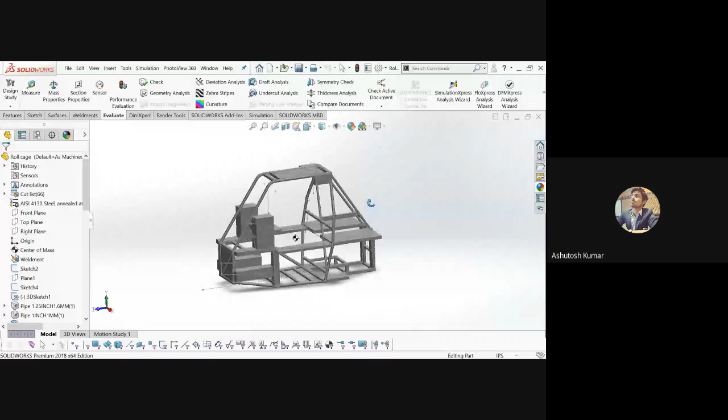This is our SolidWorks model. I have designed a roll cage considering our specification and rule book. This is a common roll cage used for an all-terrain vehicle. If we are designing an electrical ATV, we will use this type of roll cage, and I have used the Weldment command to manufacture and design it.

I'll be importing this roll cage into ANSYS. As you can see, SolidWorks only allows SLD files to be saved for our roll cage. So we will first save it in SLD format, then convert that SLD file into ANSYS-compatible files. ANSYS supports IGS or STEP format files.

Just go to Save As, which you can find on the topmost bar of SolidWorks. Go to Save As, and you will see that SolidWorks only supports the SLD file by default. So change the format and you will find IGS or STEP file options. We will save it first as an IGS file and then as a STEP file, since both formats are supported by ANSYS, and then we will import these two files into ANSYS. I've already saved them.

So I'll be switching to ANSYS now. This is our ANSYS window, ANSYS Workbench. Is it visible?

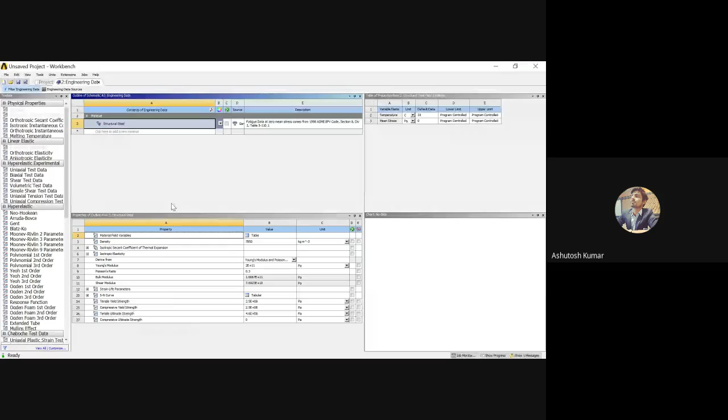It is having all the specifications such as density, you can see 7850 kilogram per meter cube, and all the other specifications: tensile yield, compressive yield, tensile ultimate, and compressive ultimate. These are the specifications that we are going to use over here. You can see engineering data is clicked right, so specification of data is done over here.

Now we are going to import a geometry over here. Just click on geometry. If you right click over it, you will find a dialog box where you can see different options. It is showing you a new SpaceClaim geometry. ANSYS provides a platform, the SpaceClaim geometry platform, in which you can develop your own model in ANSYS itself. If you want to import a geometry, just go to import geometry over here and go to browse, and you will find your saved files over there.

So I've already saved some files, roll cage in IGS format and roll cage in step format. I'll be using the roll cage step file as a model to be imported. So our model is imported, and you can see geometry has been ticked right.

Now what we are going to do, we will be specifying some of the specifications in the model: what type of force do we want to apply on it, what are the meshing parameters on it, and then what are the specifications of the force that we are going to apply - is it on the front impact, side impact, or rear impact.

So for that, just right click on model and click edit. You can see our mechanical workbench will be going to open over here. The status you can see over here is starting mechanical workbench. So ANSYS will be switching the model to the mechanical workbench, and then connecting this ANSYS workbench to the mechanical workbench.

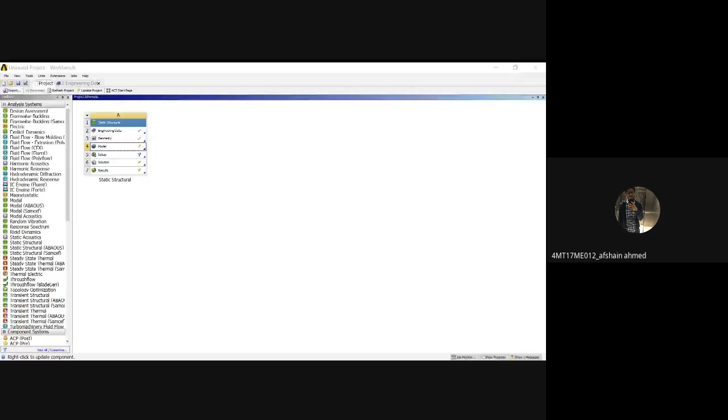Sir, may I interrupt you? Yes, sir. I think there is a problem with the video feed. I'm not so sure, but anyone in the audience, are you able to get the video feed? Let me check, sir, if there is any problem I will sort it out, because I am not getting it. Yeah, I think the video is stuck, because I'm not able to get the video feed right now. Let me check. Sure, sir.

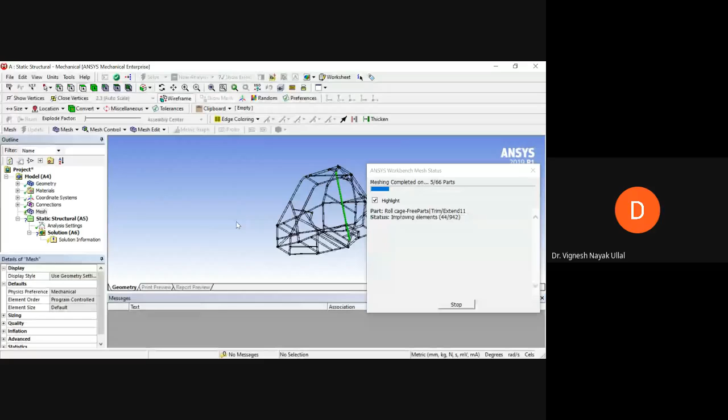Okay, okay. So you can see the meshing process is going on over here. It will take some time to get the roll cage meshed. In that time, we will have an overview of how calculations are going to be performed for the force analysis. So we will be switching towards the calculation part now.

Let me switch my calculation window.

Yeah, is my window visible to all? My calculation window?

Yes, sir. Okay, okay. So we will be proceeding with the calculations regarding the calculation that we are doing, okay, okay.

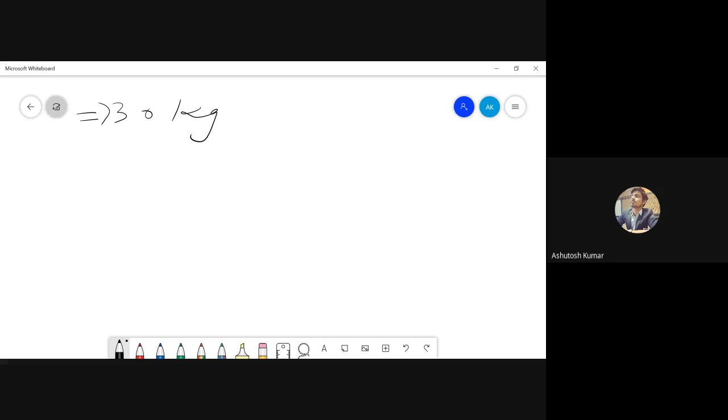So regarding the calculation we are going to have for simulating the roll cage, we are going to use some of the major specifications. Suppose we have designed a roll cage with a weight of 30 kg, and the overall weight we are taking will be around 250 kgs. Now we will be specifying some of the specifications here.

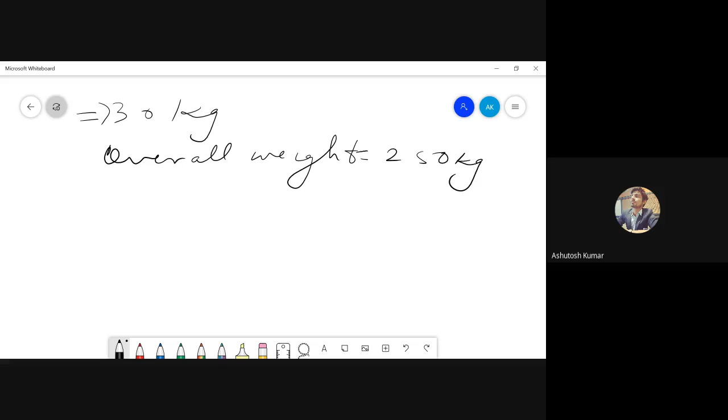Let's suppose the velocity of the roll cage will be 50 kilometers per hour, which is 13.88 meters per second. Let the impact time or time of crashing be around 0.2 to 0.3 seconds. This impact time is given by NHTSA data. NHTSA is the National Highway Traffic Safety Administration. According to NHTSA, if any crash test happens in a vehicle, the impact time of that crash will be around 0.2 to 0.3 seconds.

So this is the specified value from NHTSA. Now we are going to do the calculations, using the impulse momentum theorem. Let's have a look at it.

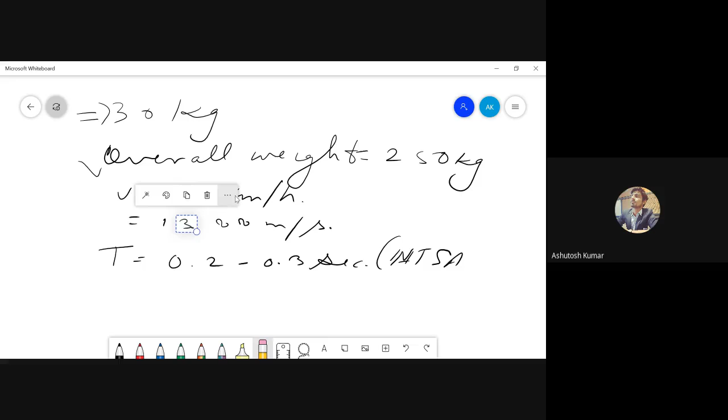Let me clear it all. For impulse, we will be using the impulse momentum theorem, which is force into time equals mass into velocity. You can find this impulse momentum theorem in any research paper. I have also written a research paper on weight optimization and force analysis of an ATV roll cage, which specified this theorem, and it got published in Springer publications.

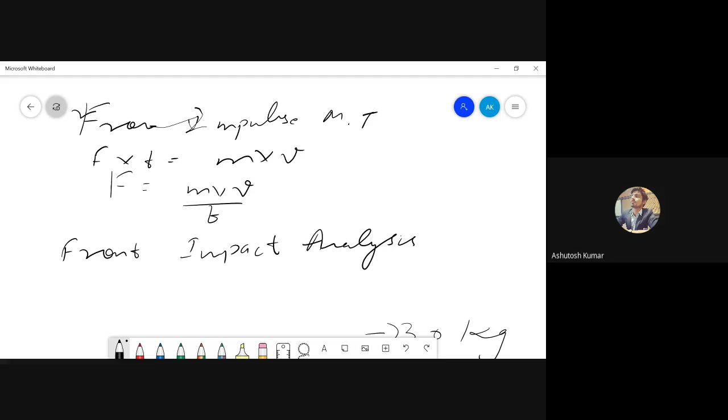According to the impulse momentum theorem, we will calculate the force using mass, velocity, and time. For front impact analysis, in which the vehicle crashes from the front side, we will use front impact analysis. The force will use mass of 250 kgs, velocity of 13.88 meters per second, and time of 0.2 seconds. We can take any time from 0.2 to 0.3 seconds, but let's take 0.2 seconds.

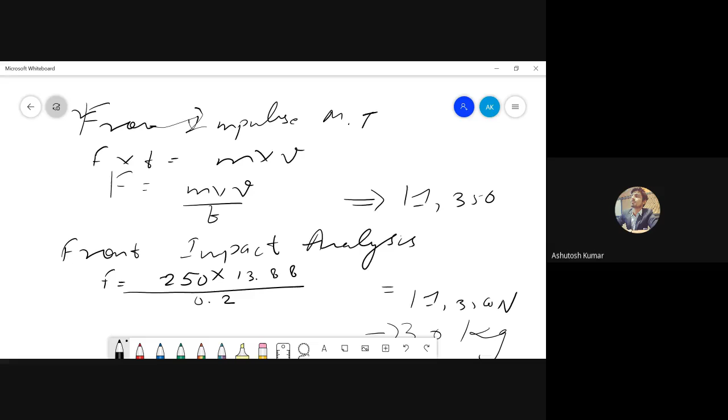So this will be 250 into 13.88, divided by 0.2, which equals 17,350 Newton. This is the amount of force which is going to be developed on the front side if our vehicle, running at a velocity of 50 km/hr, crashes into a static wall. This is the specification we have to take.

Now moving ahead, we have the force in front impact, which is 17,350 Newton. This is the force we are going to apply in front impact analysis. Now moving ahead with side impact analysis.

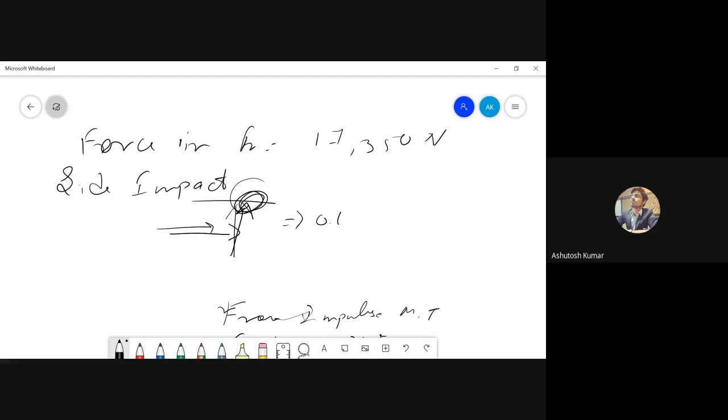For side impact, we just have to double the impact time, as I'll show you. Our vehicle is going in this direction, and side impact occurs if a vehicle crashes from this other direction. Compared to front impact, where the wall is stationary and the vehicle crashes into it, this phenomenon has more impact time. So we will assume our impact time will be doubled, to 0.4 seconds, in side impact analysis.

According to that, the force in side impact analysis will be half. So 17,350 divided by 2 gives us the force to apply in side impact analysis. This is how we calculate all the specifications for front and side impact analysis. The force will be 8,675 Newton.

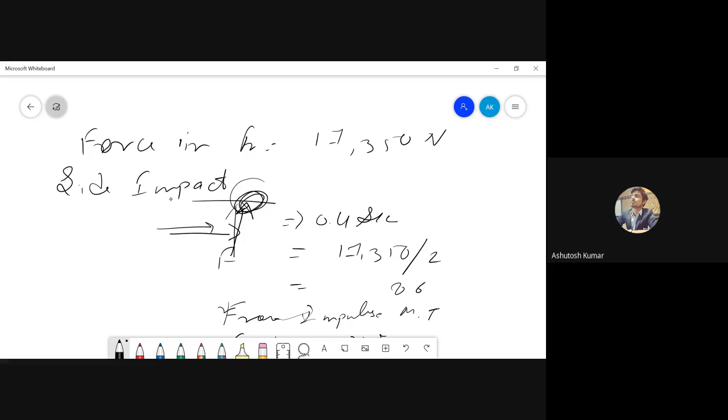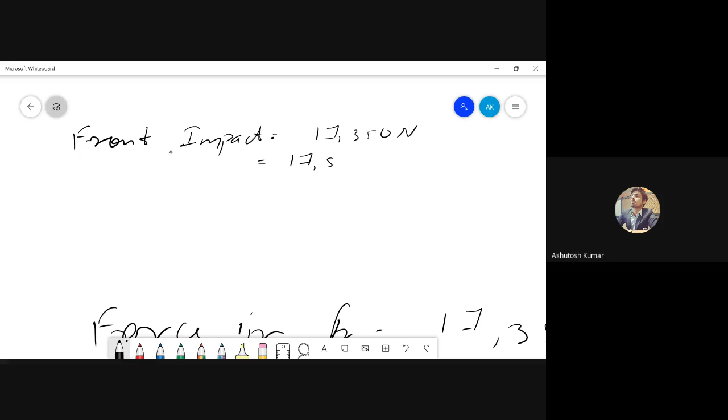So we now have the forces for front and side impact. Let's conclude overall. For front impact, we have a force of 17,350 Newton. Let's get an approximate value of 17,500 Newton, and we will apply this force.

And for side impact, we will have a force of 8,675 Newton, or we can approximate it to 8,680 Newton, whatever we want. So we will be applying these two values of force for front and side impact.

Similarly, for torsional impact and rollover impact, these are the two major simulation conditions we have to apply on our roll cage. For torsional impact, we will use the hit and trial method, applying a force of 3G, 4G, and then 5G. So how to calculate the G force? Let me show you.

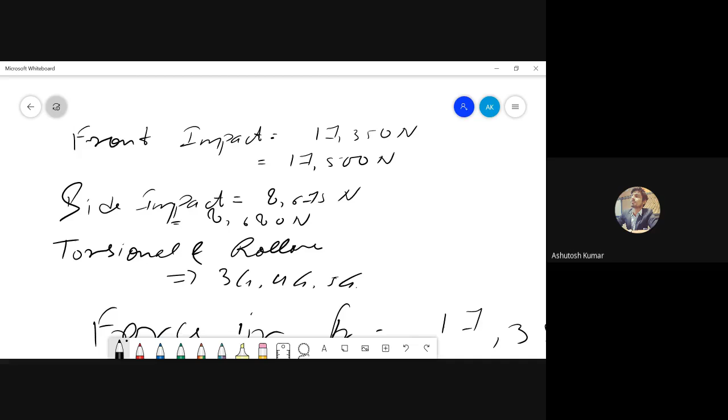G force is force, that is mass into velocity over the impact time into the factor of the force. So if we are going to use a 3G force, we'll be applying the specified force that we have calculated in front impact, multiplied into 3. So this is how we are going to calculate 3G force.

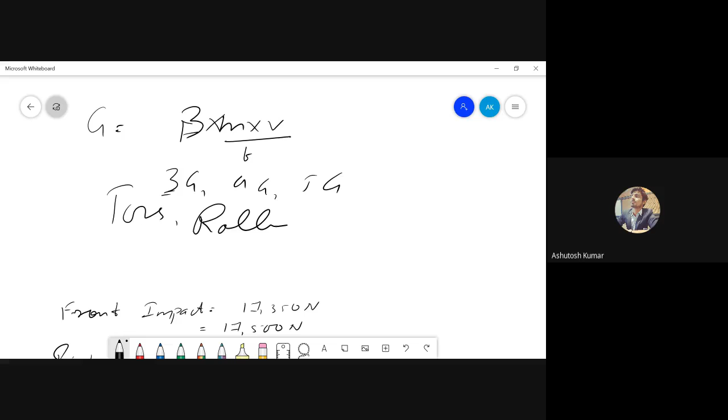So we will be using 3G, 4G, and 5G forces for hit and trial method in torsional and rollover impact. After applying all these forces on various nodes and specified areas that I'm going to show in ANSYS, we will be getting the factor of safety and stress values. Now we will be having all the specified forces for front impact, side impact, torsional impact, rollover impact, and also for rear impact.

So for rear impact, it will be going to be the same as for front impact. We will be specifying all the values on our model, and then let's see how our model will behave. So let's get started with our simulation.

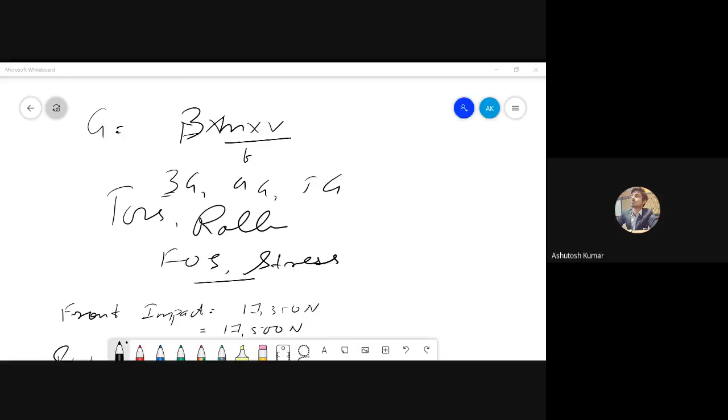Let's see if meshing has been completed. Let me switch to my meshing window. You can see meshing has been completed. Is it visible to all? Yes, it's visible, sir. Okay, so our meshing has been completed.

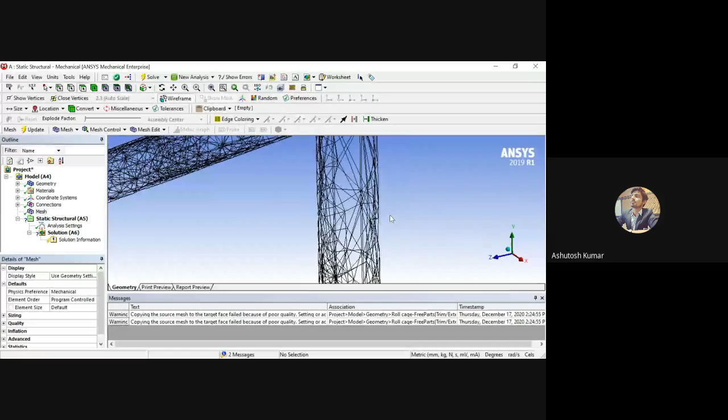I've already told you I've used a 2D mesh, so I'll be explaining about meshing first. If you zoom it out, you can find a structure of triangles and quadrilaterals in my meshing model. A 2D mesh will only specify two types of patterns, that is triangular type and quadrilateral type. So this is how a meshed roll cage will look like.

So why do we perform meshing? Meshing will divide the particular component in which we have applied the mesh into a small number of units or pieces, so that any of the stress analysis, any of the stress that is going to appear, we can easily verify and view. So this is how we will be performing meshing in ANSYS.

So after specifying the mesh parameters, we will be specifying the force that we have calculated. For front impact, we will be using 17,500 Newton. And then for side impact, we will be using 8,680 Newtons.

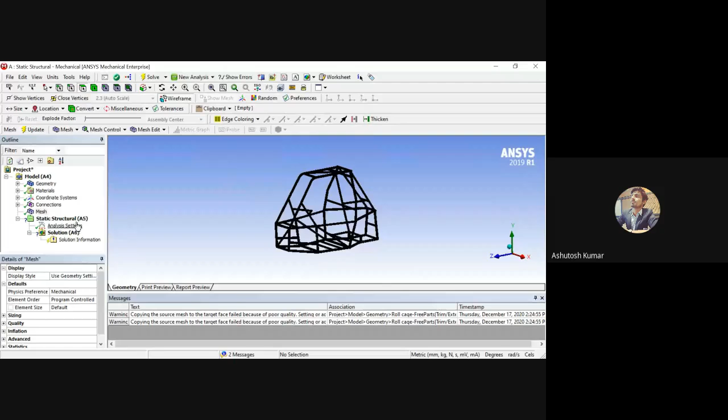So just go to static structural, and if you go there, you will right click on it and you will find the insert option. So just go to fix support.

Before performing any simulation, what are the things we have to take care of? For example, if we are performing a simulation in ANSYS or any software, we have to define some fixed points, that is constraints that are going to be in contact with the ground or in any form that are going to be a fixed point. And then we will also be specifying a point where force is going to be exerted.

So first of all, we will be specifying the fixed point in terms of front impact analysis. We will be specifying the knuckle point over there. So just go click on fix support and choose any of the points that are going to be fixed. I'll be choosing a node.

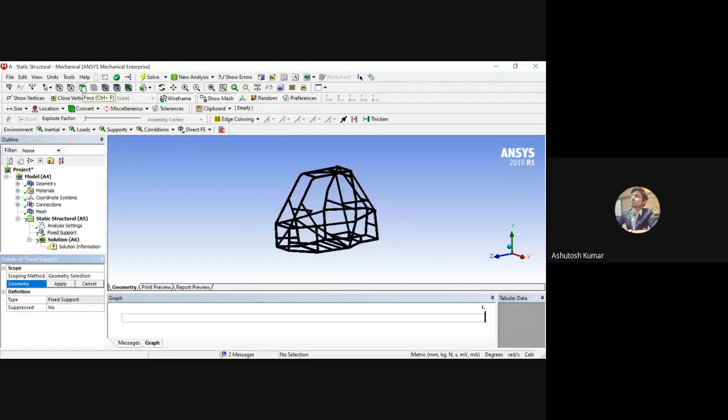You can see, you can select any of the vertex, any of the face or edge to be a fixed point. So what I'm doing is I'll be choosing a node over here. Let's see. So this will be my first fixed point.

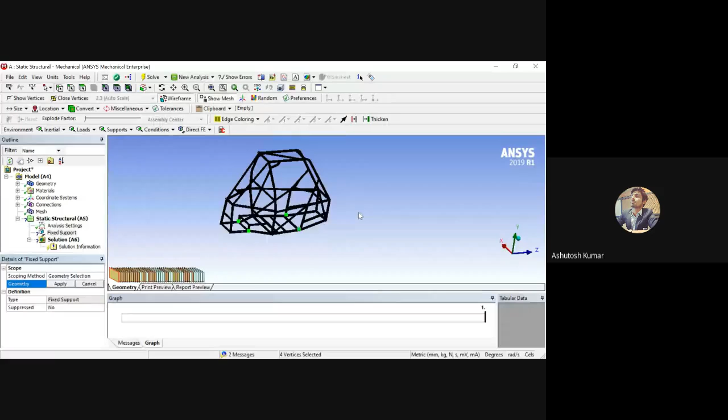And then the second fixed point will be from the rear side, first, second, and then two from this side. So these are the 4 points where my suspension geometry will be attached here, and this suspension geometry will be directly attached to the tires, and tires are in contact with the ground. That's why I'm fixing these 4 points as my fixed points.

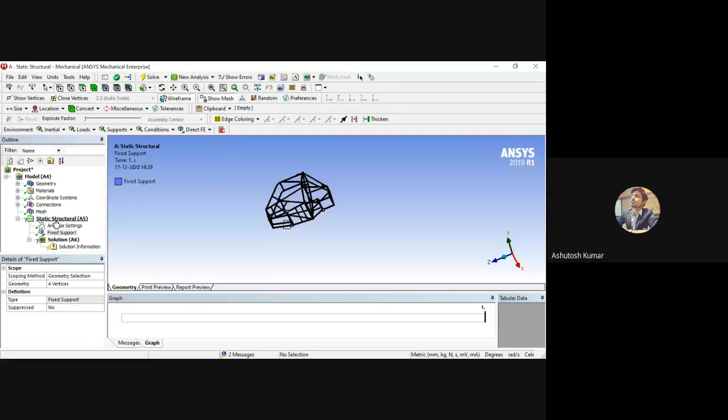So I'm just clicking on apply. You can see fixed support has been applied over it. Now what we are going to do, we will be having a force over it. So we'll be applying force. Just click on static structural and go to insert and go to force. So we will be inserting the value of force over here.

If you consider the model, you can see the force will be going to appear in the negative z-axis. This is the positive z-axis, and we are applying force in this direction. So force will be in a negative z-axis. So just go to vector and change it into components.

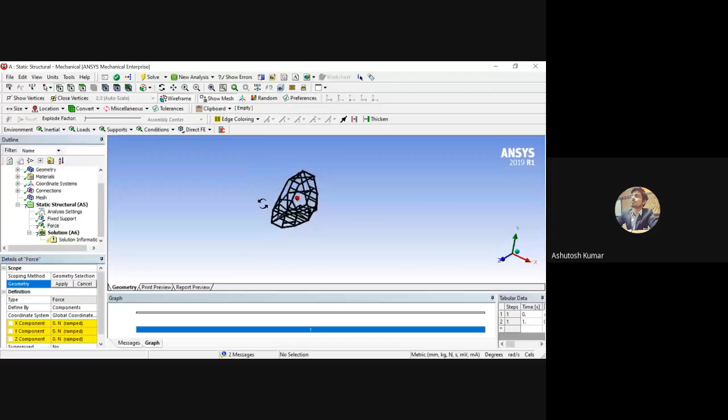First select the geometry on which you want to apply force. In terms of the front impact analysis, the front bulkhead will be in stress. So we'll be applying these 4 points. Let's select these front 4 points as our impact analysis points for the front impact.

Click on apply. You can see force has been applied, but there is no value or components specified yet. So just specify the value. We have already discussed that the force is going to be applied in the negative z direction. Just click on negative z and apply the force. It is 17,500 Newton, so click OK.

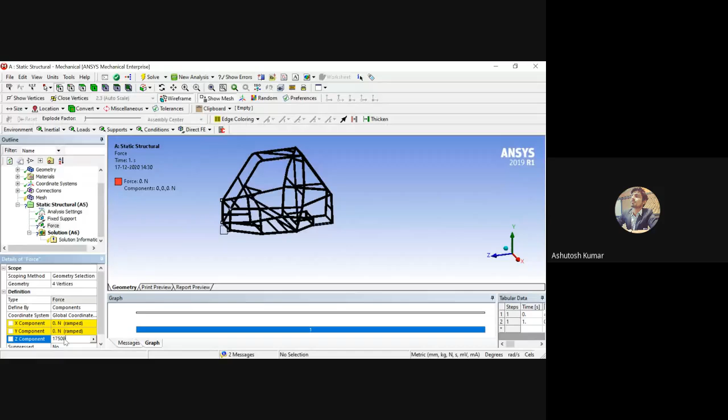If you specify 17,500 Newton, then you can see the direction of force will be in the positive z direction. So we will be specifying the force in the negative z direction. This is how you apply the force in the negative z direction.

So we have specified our force, and each component will be under a load of 17,500 Newton divided by 4, as we have selected 4 nodes. This is how you specify the force and fixed support.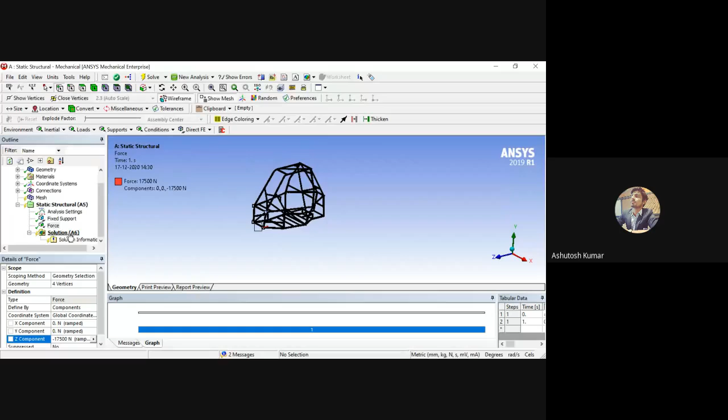So this is the force that we have applied. Now we are going to have some results. Just go to solutions and choose what type of result we want in the analysis. We want to have total deformation, and we will also have strain, which is going to be equivalent or von Mises strain, and then stress, and after this we will have a factor of safety.

Just go to this tools option and go to stress tools, and you will specify the factor of safety there. So these are the 4 major parameters that we are going to include in our analysis study.

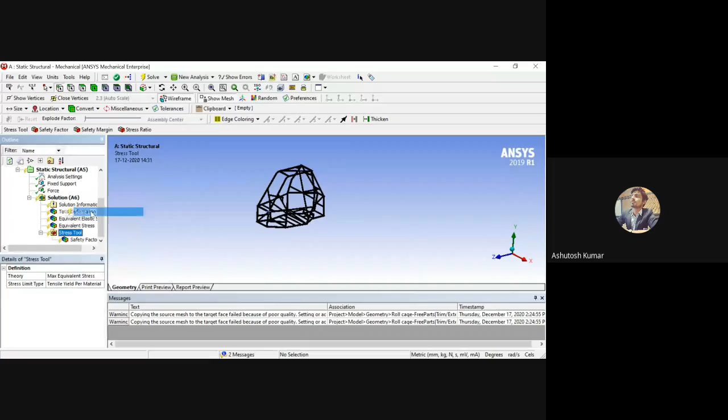So after specifying all the parameters and commands, just go to solution and go to solve. Now our study is being solved. This is how the roll cage analysis is going to start.

Now it will first verify whether the meshing has been correctly done or not. You can see we have already specified the mesh, but it will check the meshing there, and then it will start the ANSYS study.

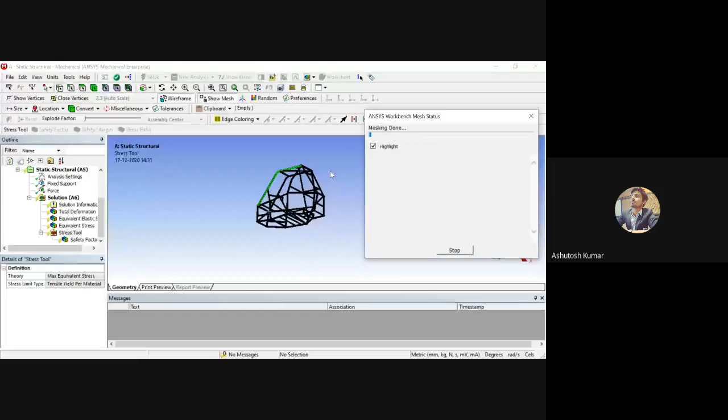So meshing has been completed. Now it will be performing the simulation. You can see the overall progress here. It will take some time to simulate the roll cage.

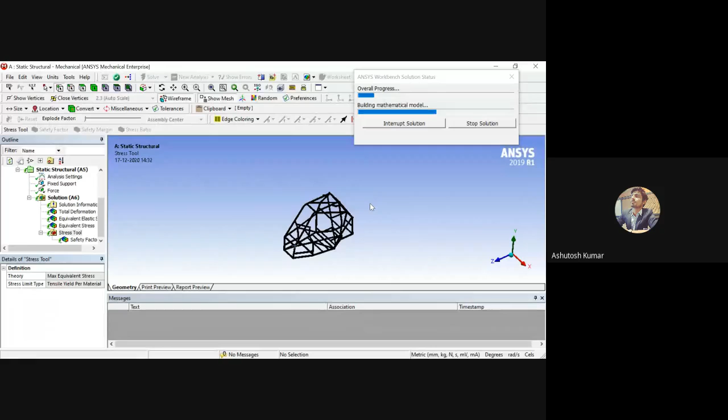Until then, we will switch towards SolidWorks and see how to design and develop a model in SolidWorks. Then we will analyze the results, how ANSYS will give us the result for front impact analysis, and similarly we will have the overall results of front, side, rollover, torsional, and side impact analysis.

So we will be switching now to SolidWorks to see how we can develop and design a model in it. I'll be switching towards my SolidWorks window and opening it so we can have an overview of how to design any component in SolidWorks. Let's switch to it.

SolidWorks is loading. Let me give it a minute to load.

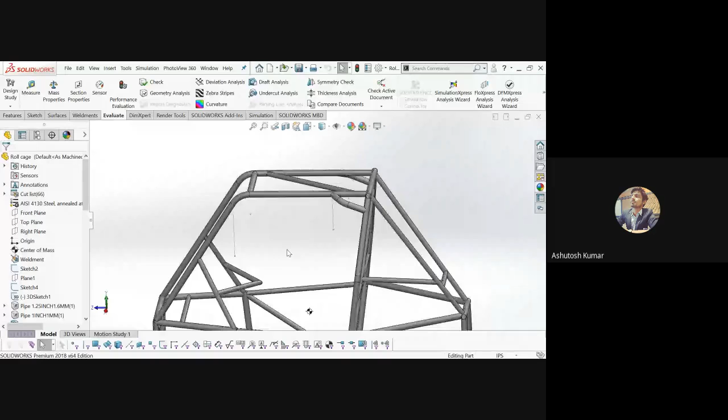So this is our developed roll cage model, the same model that we are going to use in ANSYS. Let me open it. Yeah, so this is my model, the SolidWorks model of the same roll cage that we have used in ANSYS for simulations.

So we have developed this model, and now we are going to directly simulate it here with the same force value that we have just calculated.

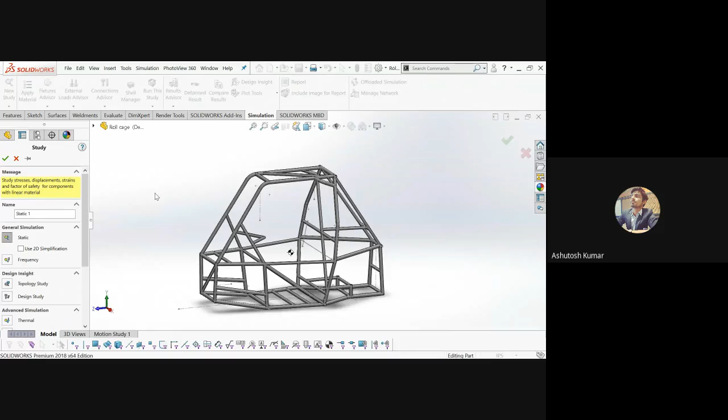So for simulating a roll cage in SolidWorks, you just have to go to the simulation command and go to new study, and you will specify what type of study we want. Is it a static study? Is it going to be a study using frequency, topology design, a thermal study which considers temperature, buckling, fatigue, non-linear, linear, and submodeling? We also have drop test and pressure vessel design studies for different components.

So we will have our static simulation on the roll cage, and we'll be naming it as front impact analysis.

So we will be using our front impact analysis study over here. I have just renamed it as front impact analysis.

So it will be switching towards the simulation window, and it will be calculating the total number of joints that we have acquired in designing and developing this model of roll cage. It will be showing you all the particular joints that we are having over here. This is the visualization of the number of joints we are going to use. So these are the total number of joints that we have in our roll cage.

So we will be first specifying the fixture. As far as simulation in ANSYS and SolidWorks is considered, some things are similar. So fixtures are going to be the same as we applied the fixed geometry in ANSYS, we will be applying the fixed geometry in SolidWorks. So considering the fixture, what type of fixture do we want over here? We will be using fixed geometry and the joints.

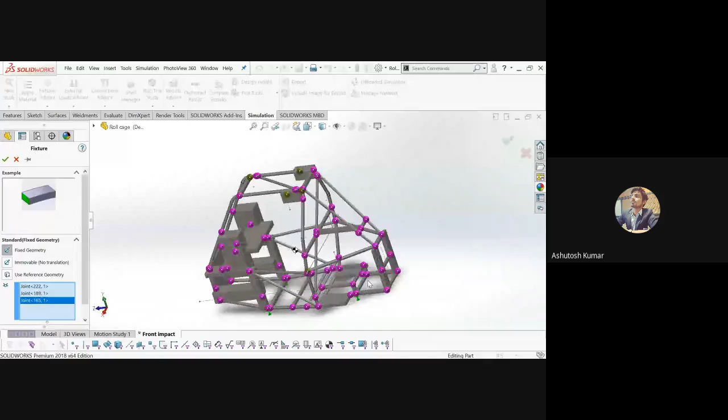So we will be fixing some points over here. Just click on the point that you want to fix and it will occur over here. I'm taking 4 points, similar to the ones I have taken in ANSYS. So I'm taking these same 4 points in SolidWorks as well. Clicking OK. So these 4 points I've already used for ANSYS, and these same 4 points I've used in SolidWorks. So I have specified fixed points for my roll cage.

So for external load, as we have applied the load in ANSYS, we will be applying a similar load in SolidWorks. So for external load, we will be using force over here, a force of 17,500 Newton. What type of force do we want?

If we want to apply force on vertices and points, then we can select this. Or for joint, we can select this. And for the beam, we can select this. So we will be using joints.

So on this joint, and similarly, these are the four joints of the front bulkhead we want to apply force on, and we'll be choosing a reference plane over it so that we can specify the direction.

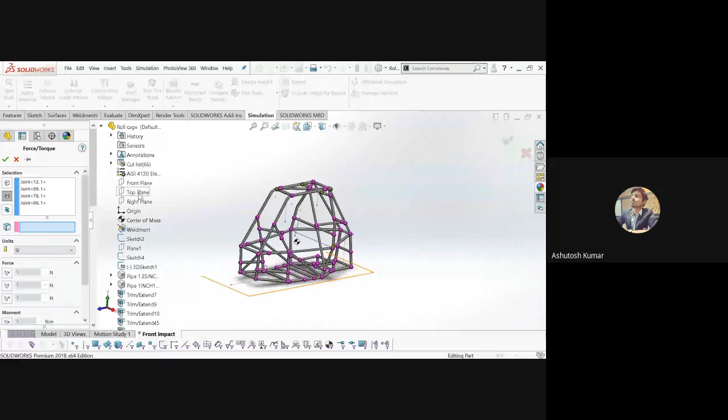So for the reference plane, you have to move towards your roll cage designing history, or the type of plane that you have used to design it. You can see if we specify our top plane, we will not be able to use the force in the required direction. So we will be choosing the front plane instead.

So we have specified the plane, and you can see what we are doing after specifying the plane. After specifying the front plane, you can just go to the direction in which you want to apply force. You can see after specifying the front plane, the force direction will appear over here. So this is the force direction currently.

So we will be reversing the direction. Just click on reverse direction, and the direction will be reversed, and we'll be applying the force according to our requirements. So the model is getting loaded up. After that we will be specifying the direction for it. Just wait for some time.

So we'll be applying the force, just reverse direction, and then clicking on the value, so we will be specifying the value to it. You can see all the specified members on which we are going to apply force. These are the four nodes that we have selected, and this is the front impact, this is the front plane we have chosen for specifying our force value.

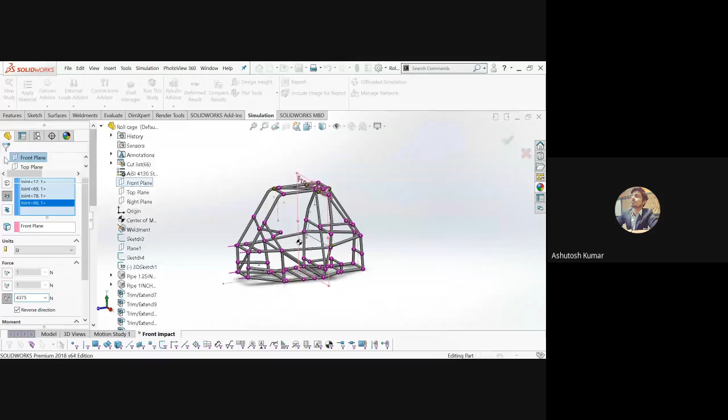So this is the required force. We'll be applying a total force of 4,375 Newton per node. Now, moving towards meshing, the same phenomena that we performed in ANSYS.

This is the same phenomena. Just go to mesh, or you can click on run study, and it will automatically create mesh and solve the study for you. But we will be specifying the mesh, so just go to create mesh option and it will create a mesh for you. If there is any problem in the roll cage, no mesh will be formed, but if the roll cage is okay, then meshing will be completed.

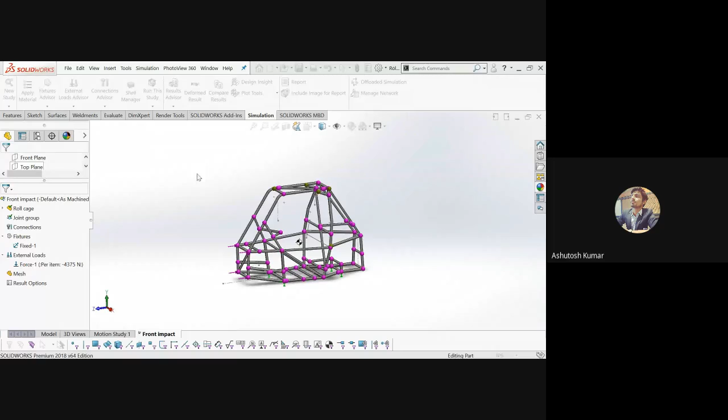As you can see, beam mesh is being performed and formed over here. I have already told you the difference between meshing in ANSYS and meshing in SolidWorks, as it is a tubular cross section, so the type of mesh we are going to have in SolidWorks is beam mesh. This is how you define the meshing parameters over there.

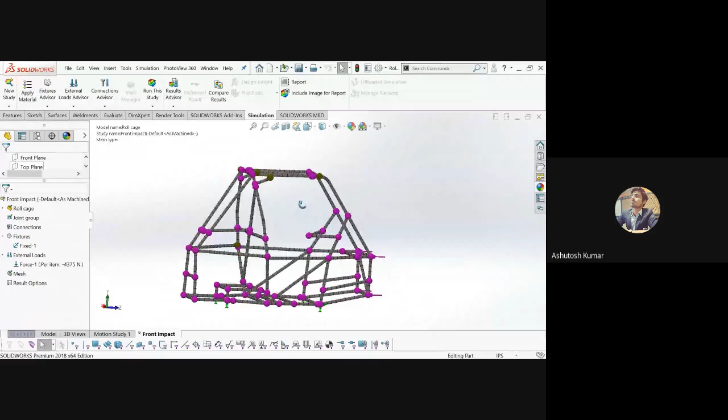Or if you want, you can just refine the mesh size. I'll show you how to do it. For refining the mesh size, just click on mesh and go to simulation advisor. You can see all the specified values of meshing over here.

If we show you the simulation advisor, there will be no interference in your model, so our model will be okay. This is the first clarification for troubleshooting your roll cage. If you are having any interferences in the roll cage, then meshing will not be completed. You can see study is okay, bodies and material is okay, interaction will be okay, and then we go through the process of mesh and run, and then we will be having results.

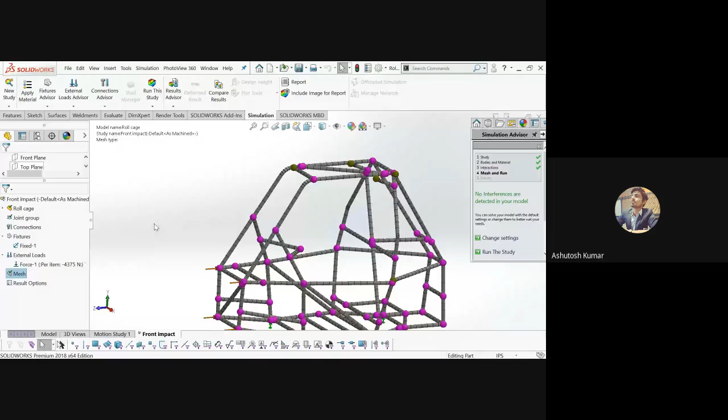You can see no interference is there. Just go to simplify model, and if we want to see the specifications of meshing, this is how you can identify any troubleshooting problem that is going to appear here.

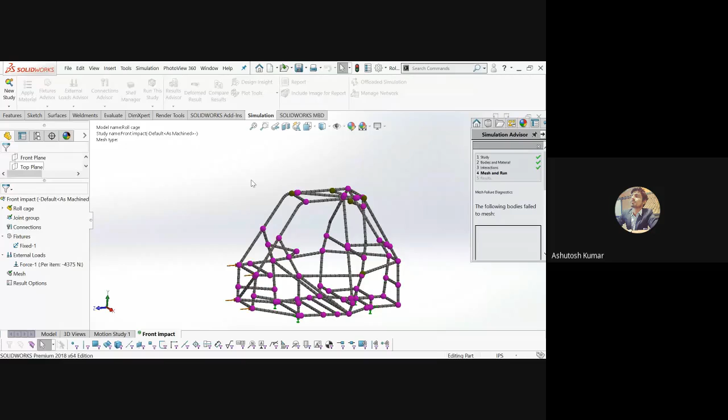You can see for front impact analysis, it is solving our model, and we are having results over here. You can see SolidWorks has generated some mesh results. Let me show you those results. Just shrink it a bit. Yeah, so we'll be having some results over here.

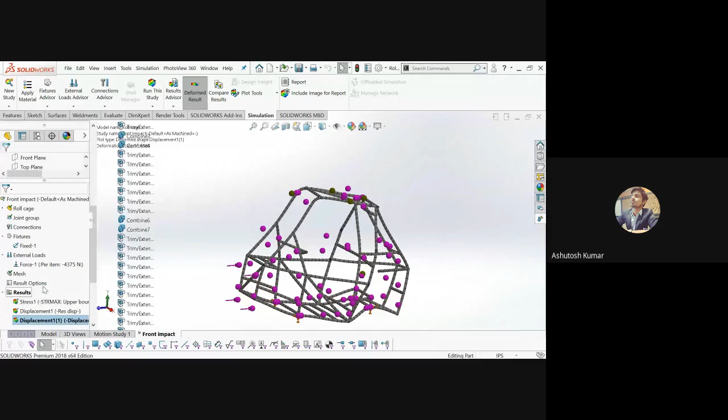Let's see the stress first. Click on show, and you will be having the stress value. I'll just hide this up.

So this is the specified result that we are going to have in ANSYS and in SolidWorks. You can see the total stress, the maximum value of stress that we are going to have in SolidWorks is 2.358 Newton per mm square, Newton per meter square, and the yield stress of this material - we are having a material of AISI 4130 in SolidWorks - and the yield stress that we are having of this material is 4.6.

So the factor of safety, we can see factor of safety over here. Just include factor of safety. Yeah, so we'll be including factor of safety. You can see we will be getting a factor of safety of 2 in front impact analysis. So our roll cage is quite safe, and we can use it in designing and development of our vehicle. Okay, so this is how you perform the front impact analysis.

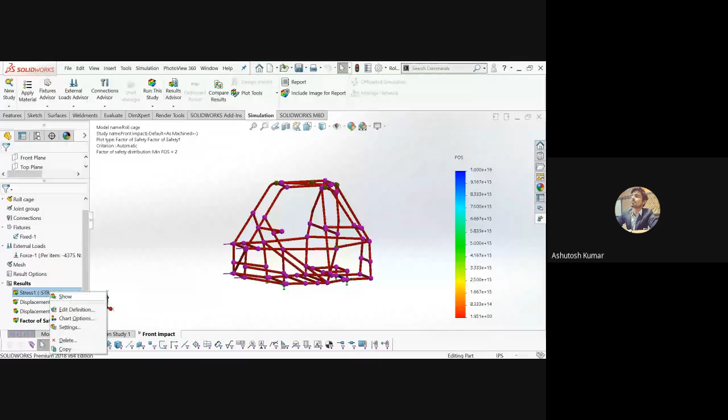Let's see some more results over here. So this is an automatically generated model. Let me clear it for you and show you the true scale model of it. Let me just correct it. So this is the model.

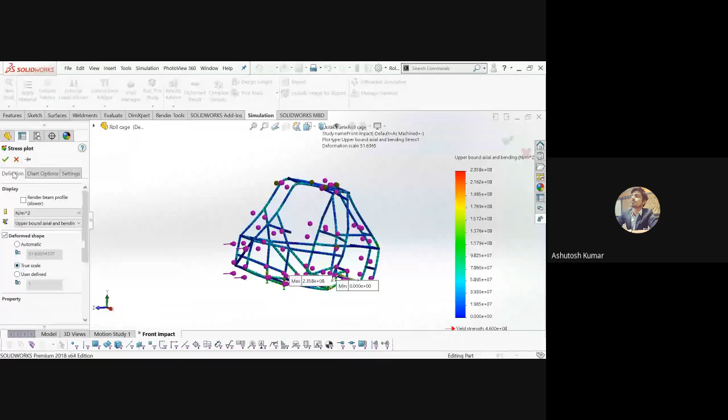Go to chart options. You can also specify the maximum and minimum annotations, or you can specify the points where you will be getting the maximum minimum stress. Just click on show maximum minimum annotations, and you will be getting the maximum minimum values. Just go to definition and use the true scale and click OK. So this is the true scale model. So in actual, what is the deformation that we're going to have?

Let me zoom in and show you the point where we get the maximum and minimum value. The maximum stress we have is on the knuckle point, which is 2.35, way less than our yield stress. So we have a factor of safety of 2, meaning it can bear a load of twice the value applied on it.

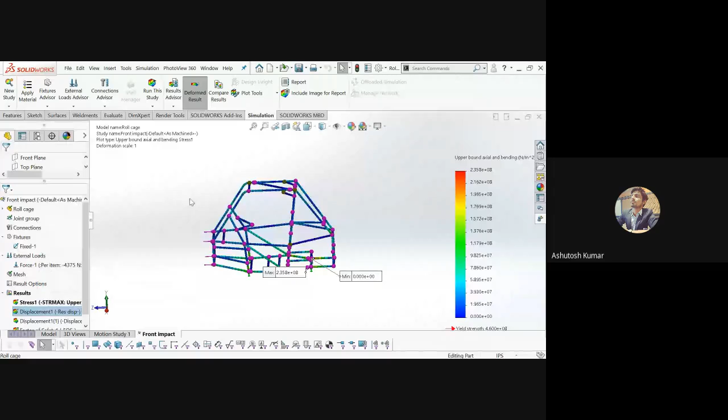This is how we identify and generate results in SolidWorks. Let me show you the displacement. This is the displacement result. Let me correct it by using edit definition and changing it to true scale value. This is the automatically generated result, now let's go to true scale. The maximum deformation in our roll cage is 3.6 mm.

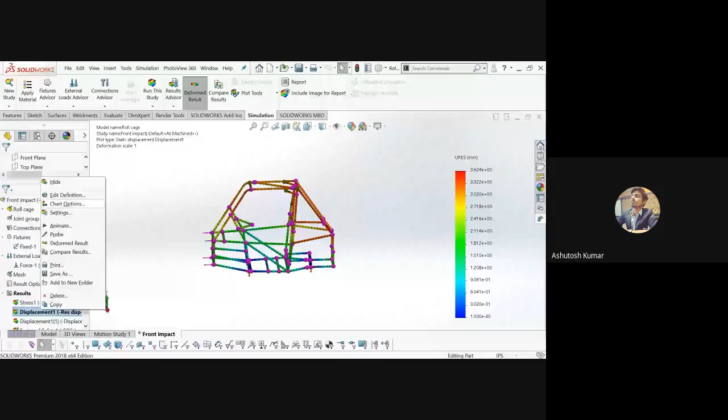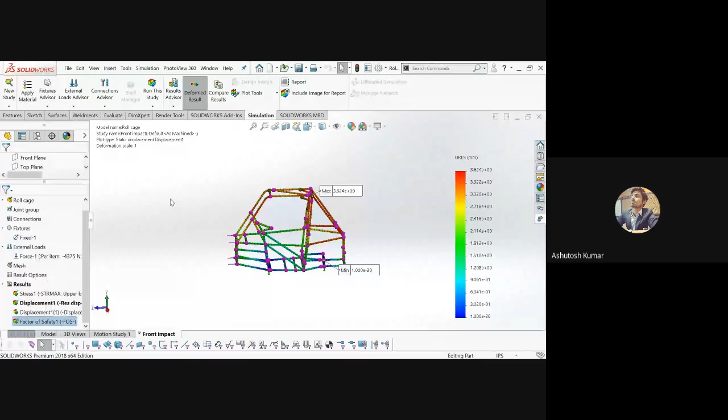Let me show you the maximum and minimum values of these results. Click OK. The maximum deformation is over here, at this point the maximum value is 3.62, the total deformation, and the minimum value is 1e-30 mm. This is how you evaluate your results, and this is the factor of safety. Let me show you once again: 2 is the minimum factor of safety that we are getting.

Now, after having the results of the front impact analysis, let's see the results of the side impact analysis. We will create a new study here. Just click on new, and we will move towards the side impact analysis study. Type here 'side impact'. We will move towards the side impact study now, and specify the force we calculated for the sideways load. Just load it, and it will calculate the joints. We will follow a similar procedure here, simulate it, and then analyze the results.

Sir, I have a question. Have you tested this in actuality? Yes, sir.

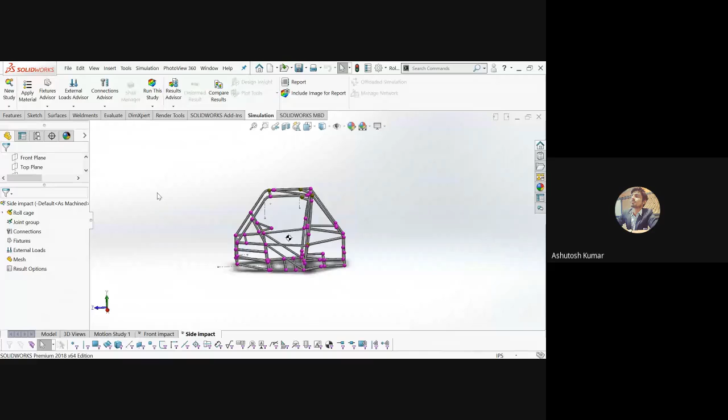Actually, we developed this model in the 2018 event, and we have also simulated it, machined it, and validated it. This is a tried and tested model, similar to the one I presented in my research paper. Based on this model, we found it capable of handling a force of more than 16,000 newtons in front impact analysis, so I have extended the load here. It is a quite secure model, and we also have results from a design competition where we secured an all India rank of 8th or 9th. This tried and tested model is made of Chromoly 4130, and it's quite secure, as I'm presenting to you.

So moving ahead, we will have our side impact analysis. Yes sir, one more question, proceed.

Sir, the deflection you mentioned, 3 mm something, does it match with your actual model when you tested it?

Actually sir, SolidWorks generally gives deflection values that are not quite accurate compared to actual model testing. Deflection can only be measured or viewed when the model actually experiences an impact, but our vehicle has not had any severe impact. So we cannot actually define what type or value of deflection we would get. But as far as our force value is concerned, if we experience that type of impact force from another vehicle or a static object, then we would get this type of deflection.

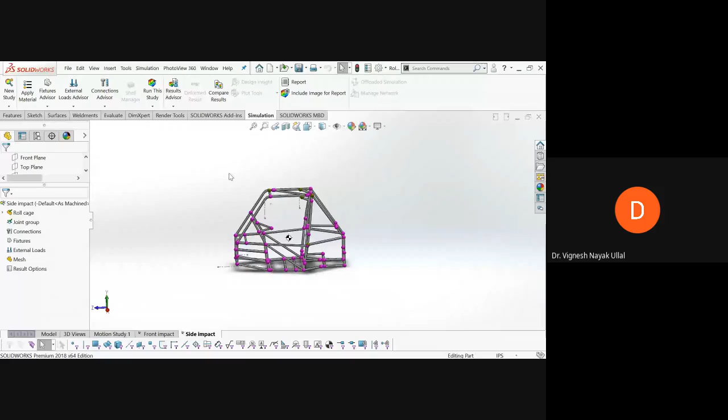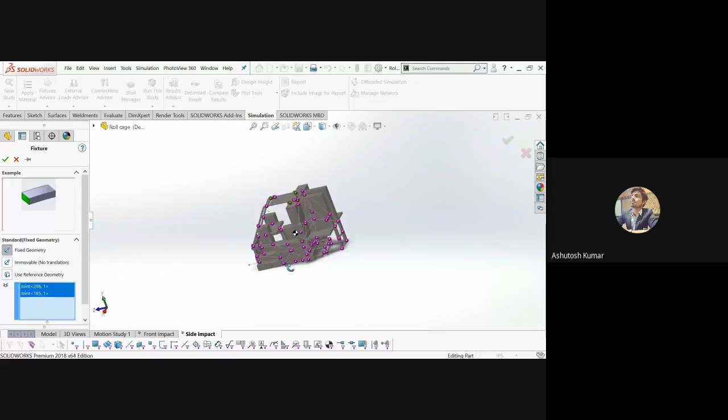As of now, we will be proceeding with our side impact analysis. Just click on fixture and we will be having a fixed geometry over here. We will be using fixture in the same 4 points that we used in the front impact analysis. So these are the 4 points that we want to fix - two from this side and two from that side.

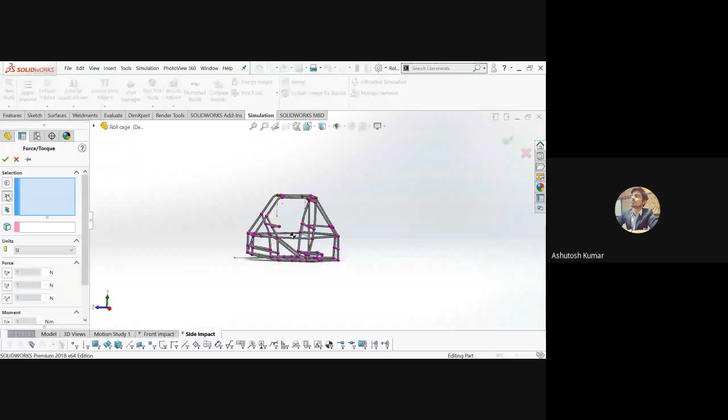Click OK, and then we will be applying a force over it in the sideways direction. Just click on external loads and apply force, and the force value is 8780. The nodes that we are going to use for this force analysis will be this node, which is the most prominent member for the right side impact, and this node. So these are the two nodes, and we will also be selecting these two nodes - so total 4 nodes we are using for side impact.

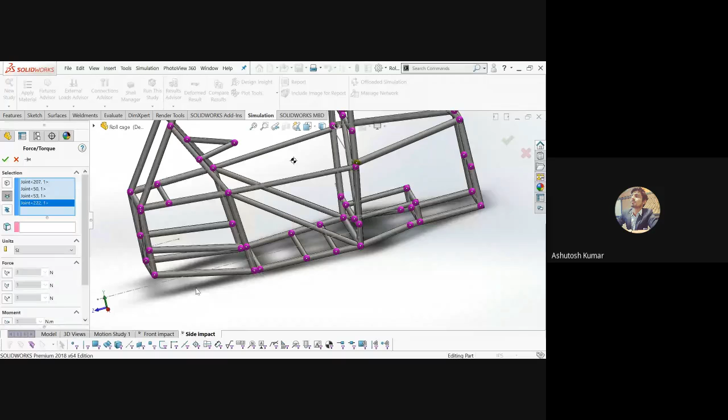So this is the structure that we are going to use. Now, for specifying the plane, click on it, drop it down, and choose an appropriate plane in which to apply the side impact analysis. The front plane will be, I think, the right plane - that's the one in which we can apply the force. So we will select the right plane and then specify the value of the force.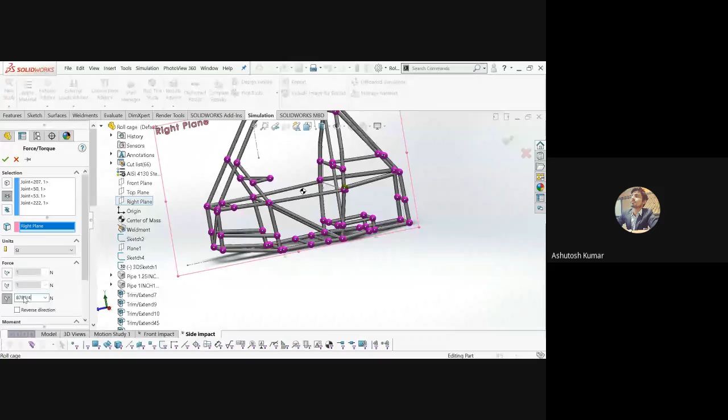So this is the similar process - selecting the right plane and specifying the value, which is 8780 divided by 4, so 2195 on a particular node. Let me see the direction of force - you can see the direction is not up to the specified mark. So we will change the direction of force by going into edit definition and choosing the reverse direction option. Yeah, so this is how you can change the direction.

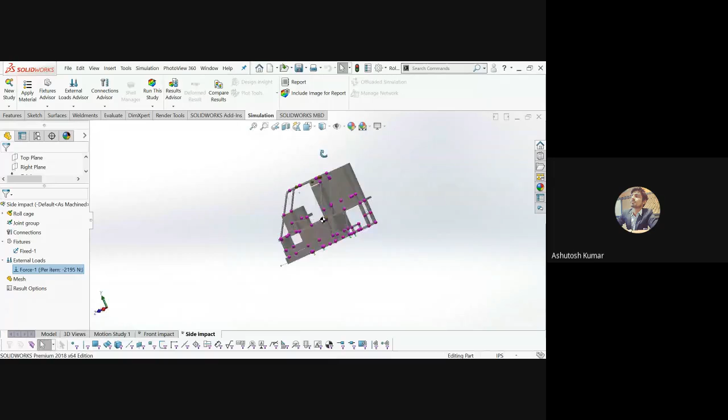Now we have defined the force direction, force value, and fixed points. Just click on run this study, and it will perform meshing first, then give the appropriate results of how it is going to behave in the side impact analysis. So meshing has been completed - it has generated a beam mesh, and now it is going to give us the results. You can see it is processing the real constraints and element groups here.

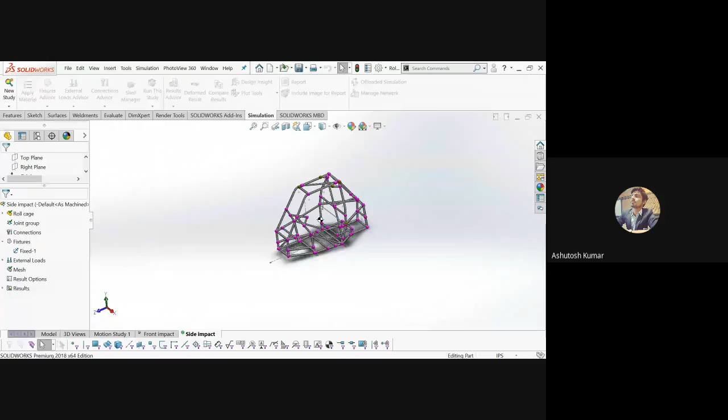So the side impact analysis is solved here. You can see the results. Let me introduce a factor of safety, and then we will go on to analyze the results. Let the model load up, and then we can have an overview of how our vehicle's roll cage is going to perform in the side impact analysis.

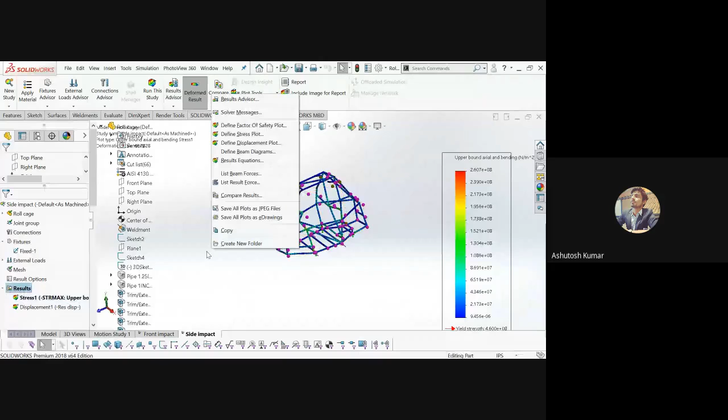Stress and deformation are the default results that SolidWorks includes. As compared to ANSYS, it will not give us specifications of what type of result we want; it automatically generates results according to its requirement. So this is the major definitional difference between SolidWorks and ANSYS, apart from the meshing parameters.

For factor of safety, we will be having a factor of safety of 1.8 in side impact analysis. According to standards for designing an ATV, the minimum factor of safety required is 1.4, and our factor of safety in both conditions is 1.8. So our vehicle is quite safe in both conditions.

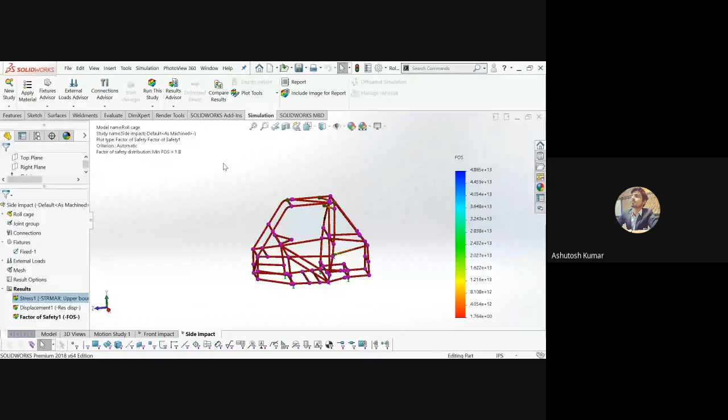Let me show you the stress value. Just go to edit definition, and I'll change it to true scale first, then include the maximum and minimum values. So this is the stress that we are going to have. Maximum stress is on this point, which is the RRH, rear roll hoop member. Before that member, the engine or motor will be established. This is how you perform the front and side impact analysis.

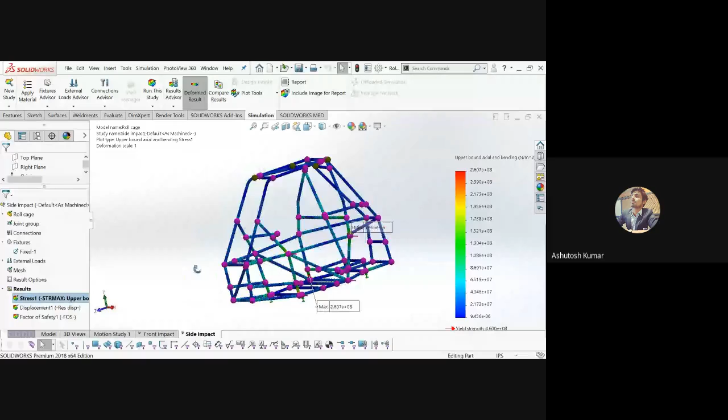After performing the analysis, we will generate a report out of it. So how do we generate a report in ANSYS or SolidWorks? Both software give you the advantage of generating a default report. Just click on report, and you'll generate a report from SolidWorks or ANSYS. Let me show you how to do that.

Click on report, and you will see all the specifications of what type of description you want in the report. SolidWorks gives you options like description, assumptions, model information, study units, material, loads and fixtures, connectors, contact information, mesh information, sensor details, resultant forces, and other specifications, results, and conclusions to be included in the report.

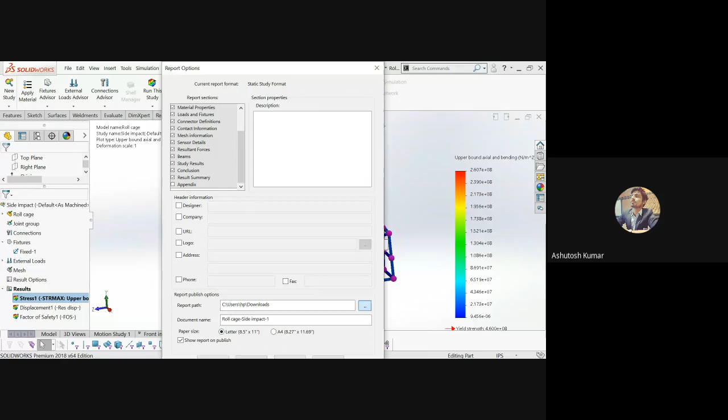You can choose any of the options you want included in the report, and we will have a report path to save it. I'll just save it on my desktop, then click OK, and report generation is going on.

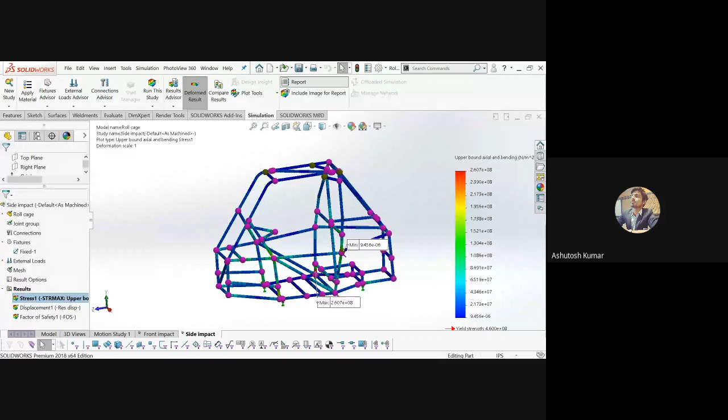So this is how you perform meshing and analysis in SolidWorks and ANSYS using any roll cage we have designed, basically for EV. In terms of EV, our major focus is on making the roll cage as light as possible while also considering durability. This is how you perform analysis in SolidWorks and ANSYS.

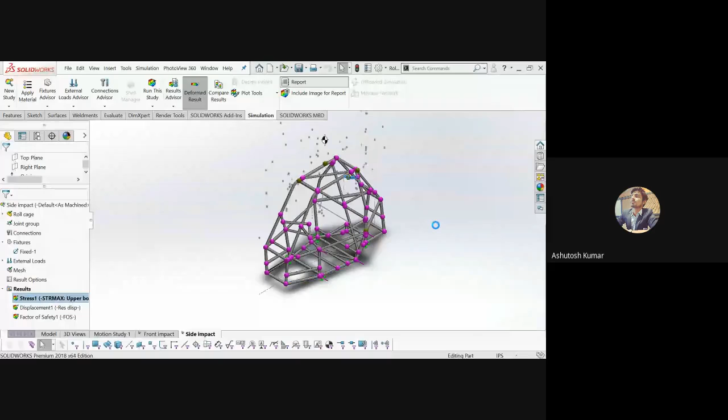By how much, probably? For example, if I take one pipe of chromoly, which is 3 meters—the standard market availability is a 3 meter pipe—it will cost around 1500 rupees per pipe. As compared to that, the composite will cost around 3000 to 4000 rupees per pipe—more than double, sir. So this is the major problem that occurs by using composite material.

And one more thing—the notes you are showing right now. Yes, sir. Yes, sir. No, please continue. Yeah, yeah, yeah, please continue, sir.

One more thing: before participating in any competition, students generally have a specified rule book. In that rule book, it is specified to use only steel as the material. That's why people generally focus on steel, not composites.

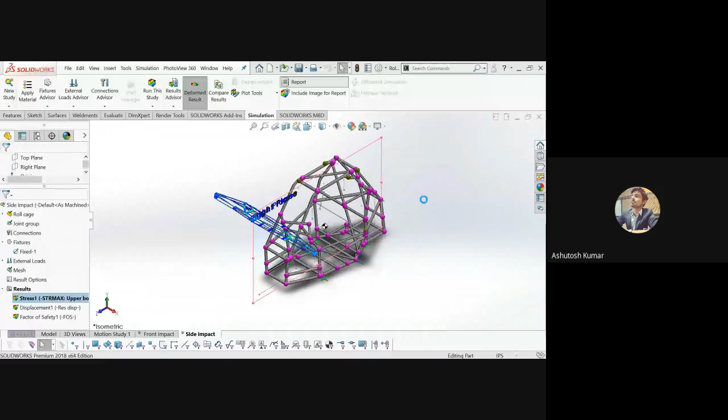Hello? I think we lost the audio. Hello, hello, am I audible sir? Yes, yeah. So am I clear, or should I repeat the answer?

Basically, beyond a certain size, there will not be much change in the value of the stress. So that is the point where you need to stop. Beyond a certain point, there will not be any major change in the stress value, so we have to specify mesh parameters up to that point only. One more thing is that the computational cost criteria will also come into existence when decreasing the mesh parameters beyond some extent, so we have to take care of that also.

Those nodes that I had shown, they are all welded joints, right? Yes sir, they are all welded joints. Basically I have designed this roll cage in SolidWorks using the weldment command, so all the joints on which any member is welded are specified as a node, taken as a node in SolidWorks.

Okay, yeah. So what were the biggest challenges in actually fabricating this roll cage?

Majority of the challenges included providing adequate area and clearance to the driver, as this roll cage is basically designed for one person only. So the major concern is how the driver is going to adjust in it, while satisfying all the rules established by the governing authority. And one more thing is how we can make it as light as possible while reducing the cost as well.